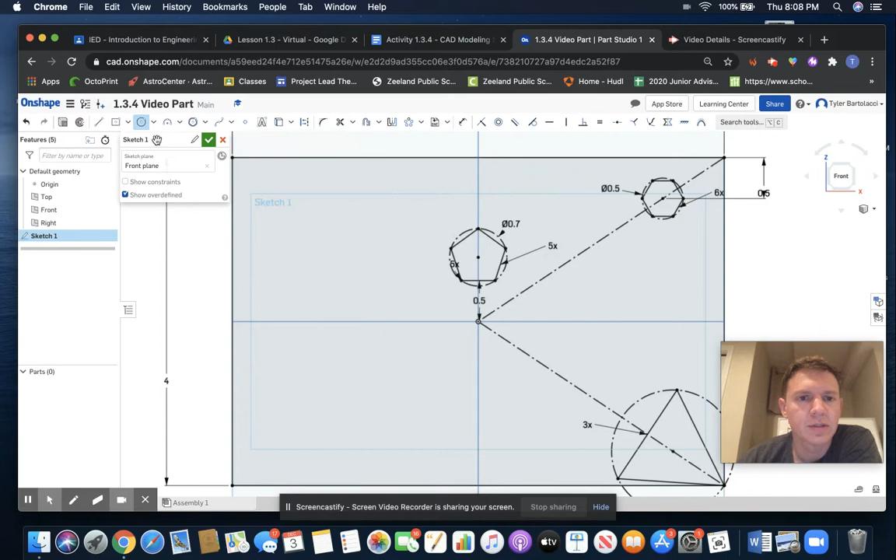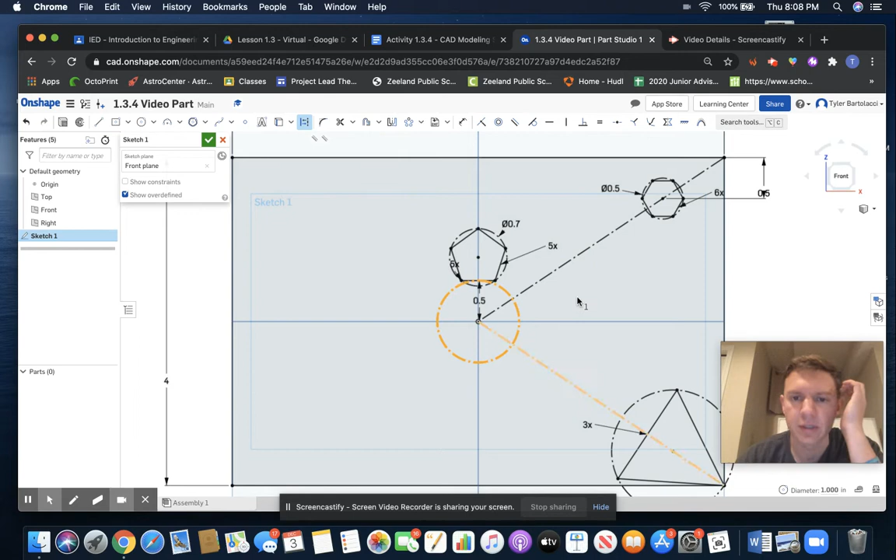So of this pentagon. So I'm going to first just throw a circle on there that is going to act as kind of the pattern I'm going to follow around. There it is. Notice it's not a construction circle, so I'm just going to hit escape to get out of my circle tool, click my circle, and then find the construction tool, and there it is. And all that did was change my circle to a construction. It won't show up if I try to extrude now.

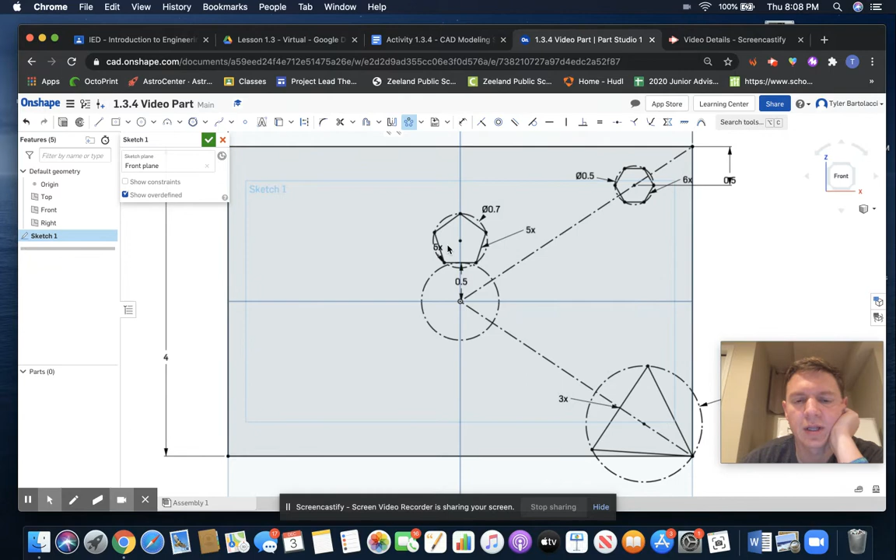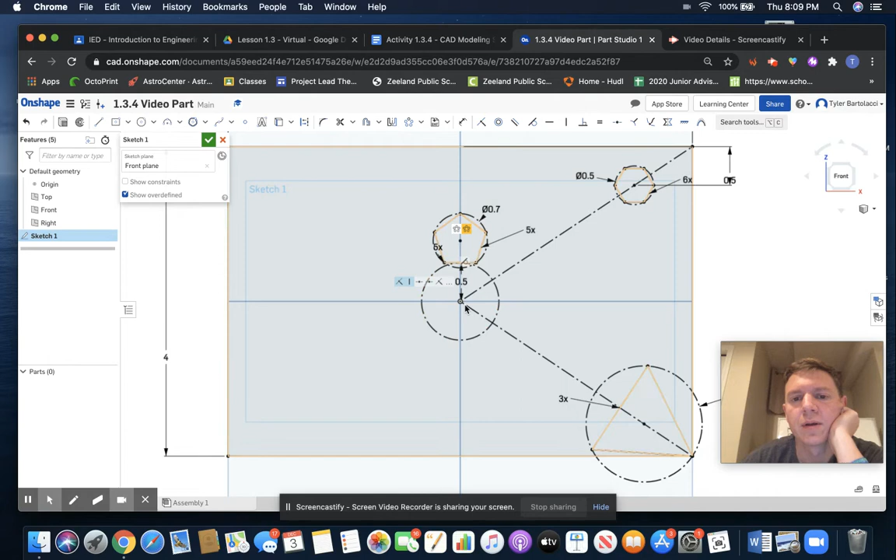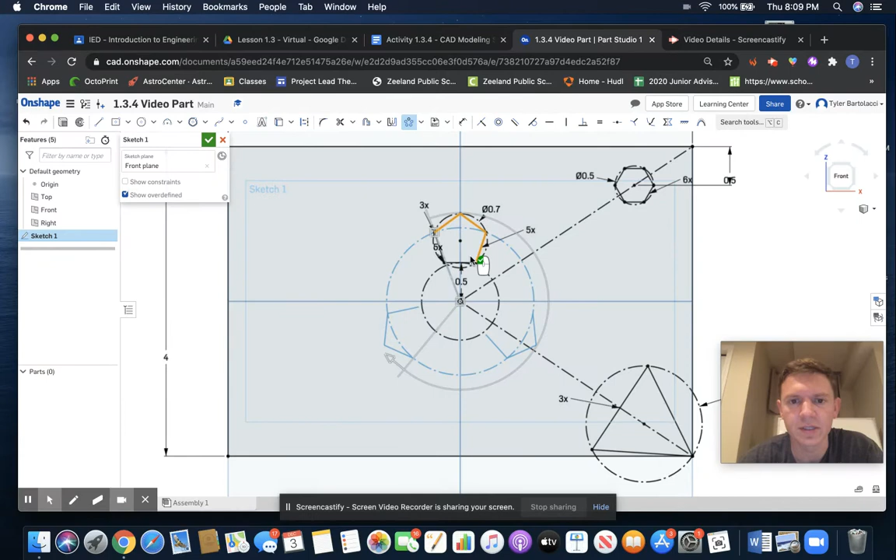Okay, so now I'm just going to go up into the circular pattern. There it is, circular pattern. Drop down, you can click it as well. And first, you can hover over it and it'll tell you exactly how to use it. What I'm going to do is just go ahead and select all the things I want. Yeah, I want all those things. Oh, that's not exactly. We're going to try that again. Circular pattern. I'm going to select. There we go. Didn't have it fully selected, I guess. Zoom in, make sure I select the right thing.

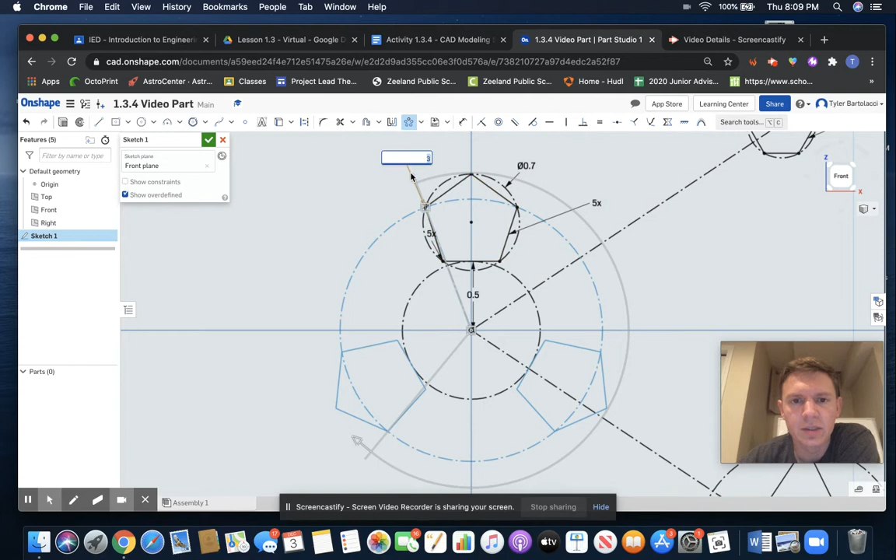And then you will see that 3 popped up, 3 new pentagons. All right. So now I just have to change a couple things. This times 3, there's a lot going on here. It's kind of messy, but this times 3 is actually talking about how many pentagons I want. I want 5 total. And if yours aren't perfectly spaced, you just have to drag this as far as it goes. Mine's already dragged 288. It's a little bit of math that Onshape's doing for us. But drag that clockwise as far as it goes, and you get them nice and evenly spaced.

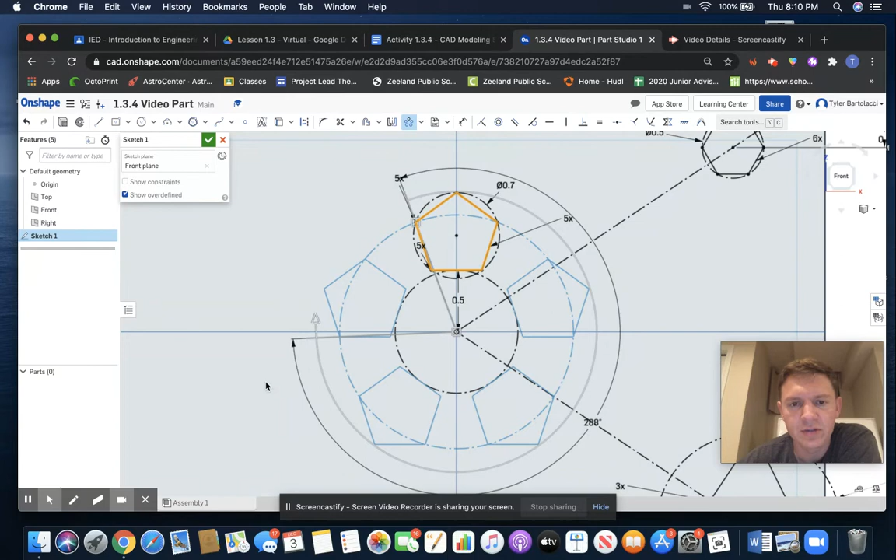Then what I have to do is click, and there it goes, shows up. Now there's a lot going on there, I understand. There you go, you got a nice pattern. Next, now this size might not be fully correct, but that's okay. I'm gonna try to use the linear pattern. Linear patterns are kind of cool in that some programs have a linear pattern and a rectangular pattern separate, where they're called different names. And in Onshape it's called linear pattern, so it does both the rectangular part and the linear part.

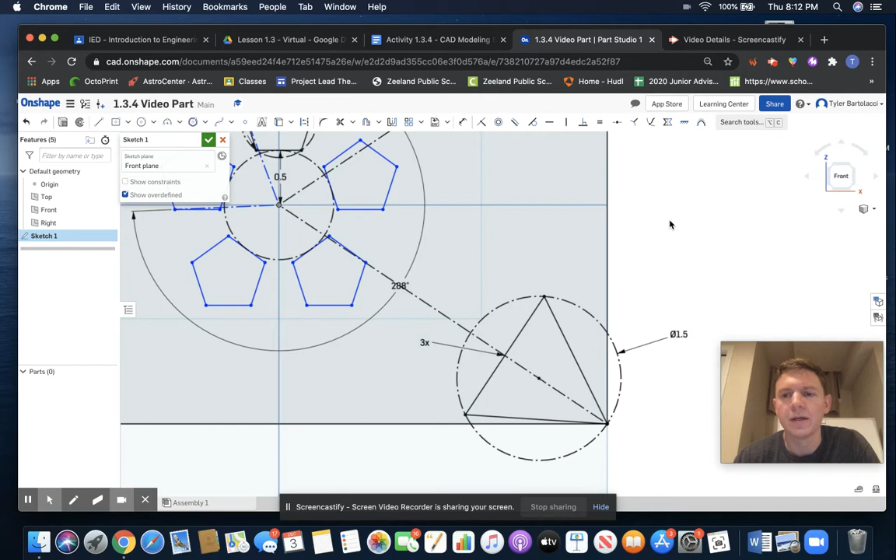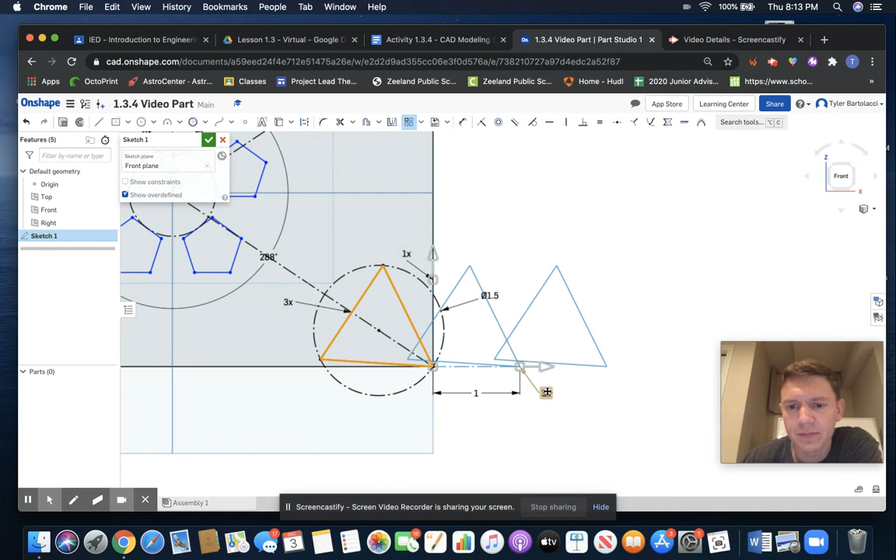So I clicked linear pattern. Now I'm just going to go select, make sure it actually is selected. There we go. Select the things that I want. Okay, and actually, I'm going to hit escape. And just to make it easier on myself here, I am going to select this point right here. And I'll select all 3. Notice this times 3 came up again. And that's just saying there's 3 triangles. So let's just make, I don't know, 5 of them. Okay, now there's 5. And this one will toggle how they're spaced, but you can also toggle how they're spaced by using this.

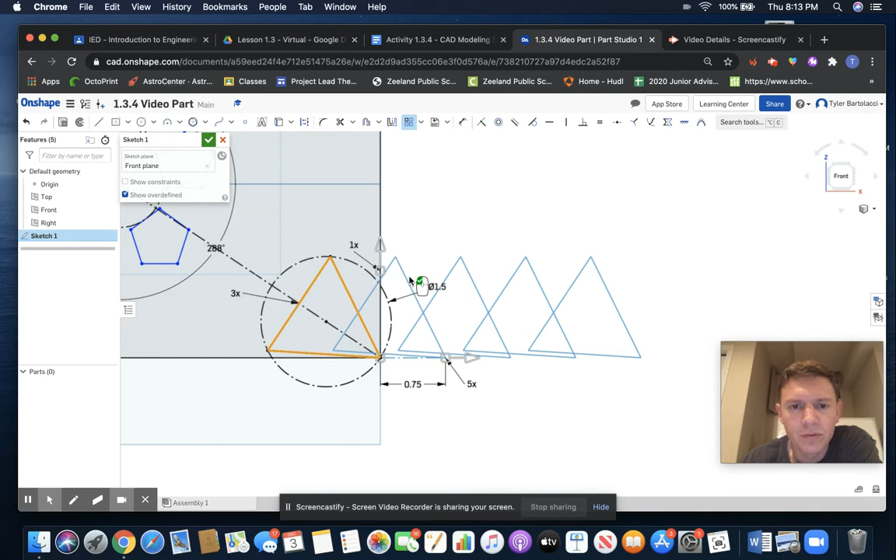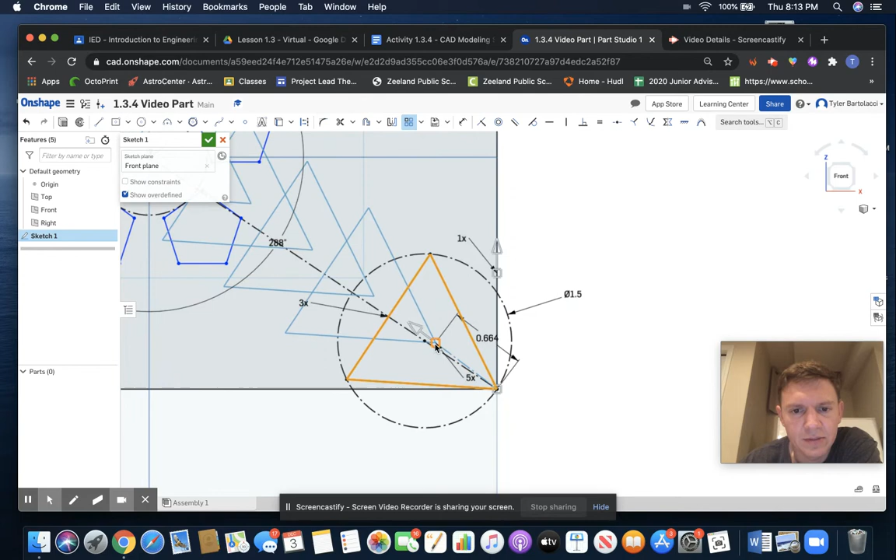And actually, I want those to line up with this line. So what I'm going to do is grab that box and just kind of pull them over. Unfortunately, it doesn't snap. That's kind of an annoying part here on Onshape. If it does, I'd love for somebody to figure that out and let me know. I haven't figured out a way to snap that to a certain place. So I'm just going to zoom in and make sure it lines up where I want it to. That looks fine.

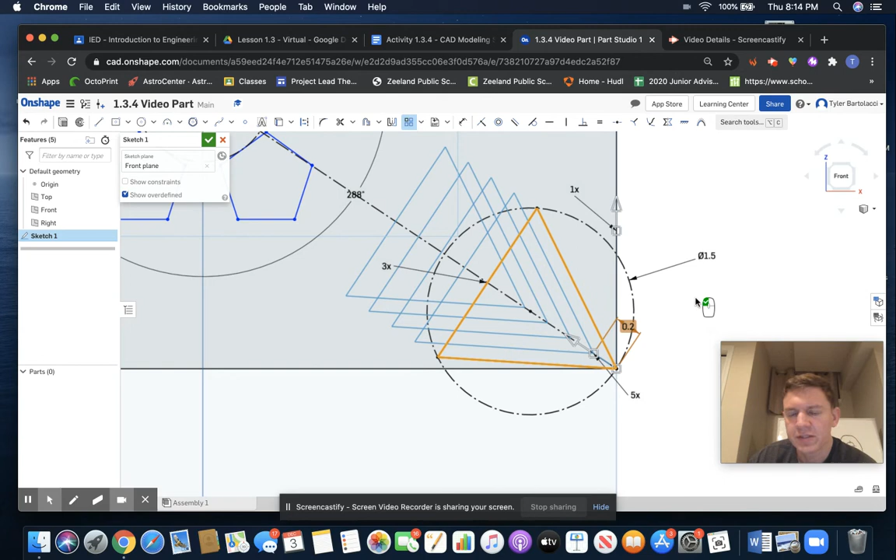And now I'm going to change this to something a little smaller. I don't know, 0.2. All right, and so I've got 5 triangles patterned there in the one direction, and I just notice my mouse is asking me to click. So just click, and there, my linear pattern's done. The last thing I want to do is another linear pattern, sometimes referred to as rectangular pattern, on this, because I can get multiple rows of the pattern.

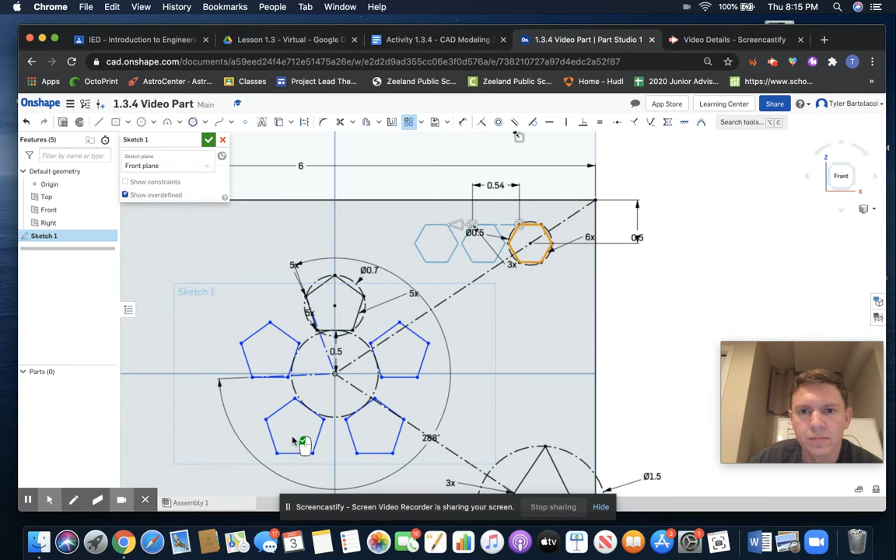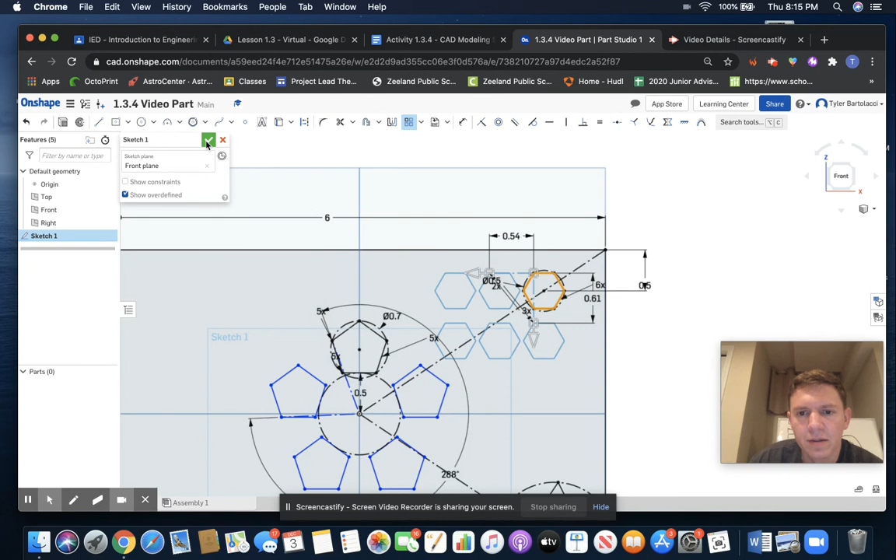So I'll go back in, I'll hit linear pattern, make sure it's selected. There we go. Click the things I want to pattern. You see the pattern starts to form as I go through and click the features that I want included. And then I am going to actually pull them this way. And I would like a second row of those. So if I zoom out a little bit, you'll notice that I have this option as well. I want a second row, and I can kind of set that down where I want it. I'm going to set it down right in here. Then check. And there's my second pattern, which is pretty cool.

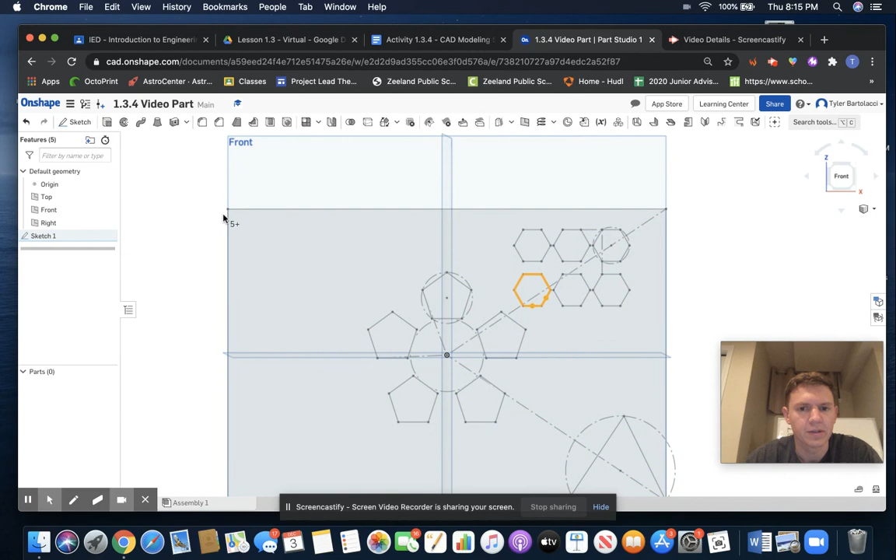Say I want to get rid of one of these. I'll just go in, highlight it, and delete it. Right click. Ooh, don't want to delete sketch 1. I'm out of sketch 1. I better go back in there. Let's go back into edit sketch 1. There we go. Now I can click all of these. Right click, delete. There's 6 entities, and now they're gone.

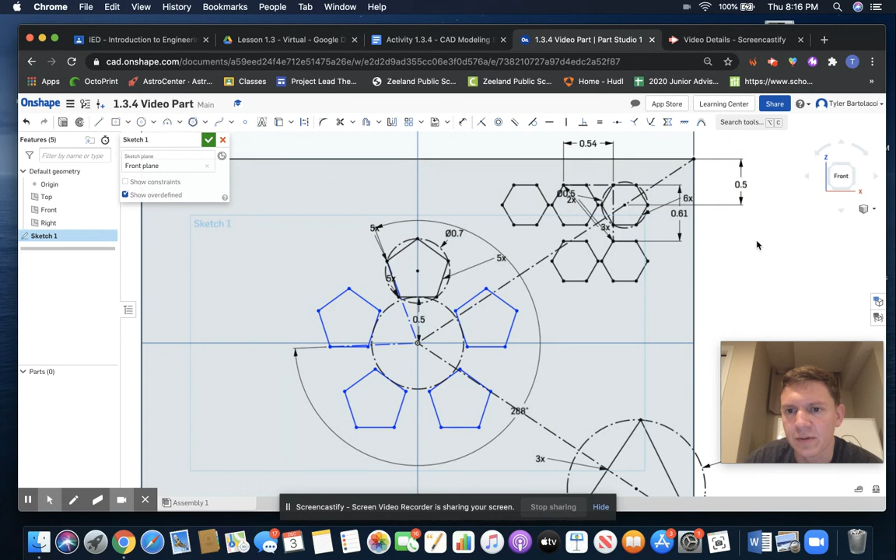If I ever want to edit any of those distances, I can come in here. I understand it's messy. You can move those around to fix them. For example, I may move that a little bit to fix it. But there you go. There's 3 ways to use those patterns.